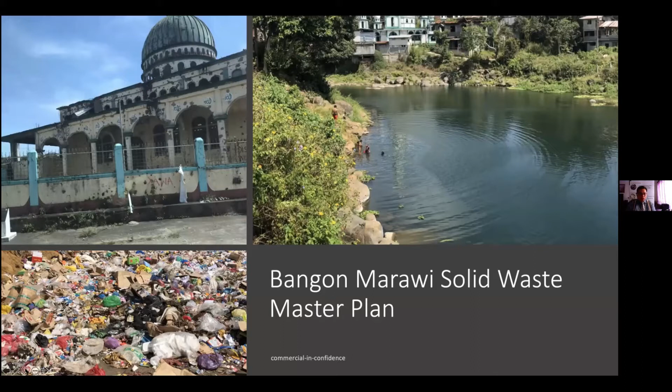Marawi City was the victim of the siege, and they are now in recovery called Bangon Marawi. So we finished the consultancy on the solid waste management plan under the auspices of EMB Region 10. EMB Region 10 is also our client in quality management system.

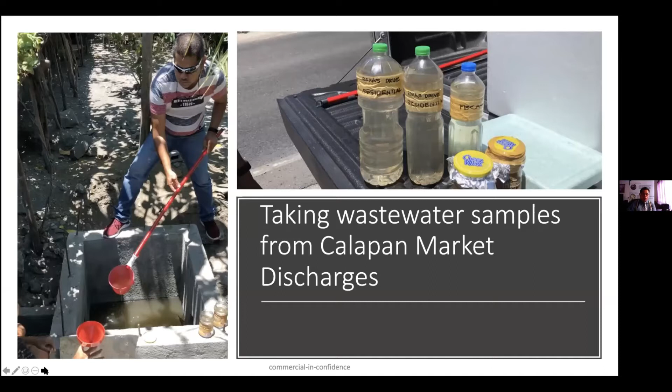We were the consultant of Calapan or EMB Region 4B under RD Michael, sa Calapan River for the protection of Calapan River sa Calapan City. So we conducted this feasibility study and we were able to finish that. This is the board meeting of the Calapan River Water Quality Management Board and EMB.

4B in Mimaropa. Okay, so we are the consultant for the protection of waters of Panglao Island in Bohol, with the leadership of local mayor Leonela Montero, and of course the local councilor on environment Noel Hormachuelos. So we were able to deliver, just during the pandemic, the National Sewerage and Septage Management Plan for the municipality of Panglao.

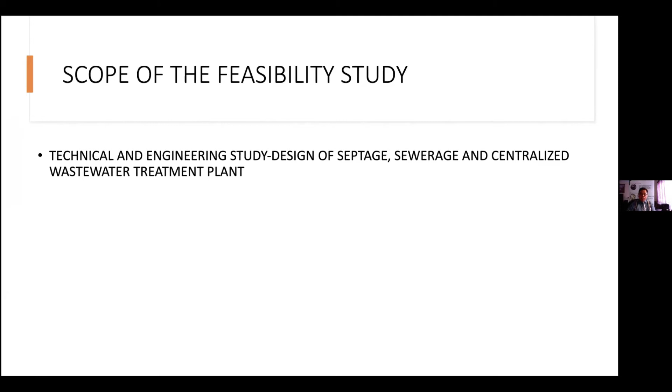So there you are, that is our work. What were the scope of our feasibility study? The scope of our feasibility study is we conduct technical and engineering design study for the septage, sewerage, and centralized wastewater treatment plant. We conduct financial analysis of the different technologies of the septage, sewerage, and wastewater infrastructure and sourcing of investors as well.

We conduct environmental impact assessment of the infrastructure, including protection of indigenous people and gender sensitivity. That's part of the feasibility study.

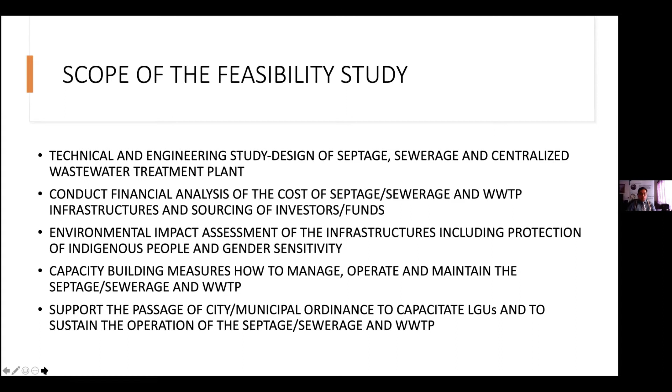We conduct capacity building measures on how to manage, operate, and maintain the septage, sewerage, and centralized wastewater treatment plant. And we support the passage of municipal or city ordinances to capacitate local governments and to sustain the operations of the septage and sewerage. So those are our deliverables. Kung meron dyan mga LGU, we can help you do that.

So these are some of the pictures of our treatment plants. This is our biggest wastewater treatment plant in the Philippines, 1.7 million liters per day of sugar mill wastewater treatment, the hardest wastewater in the world. Napakataas ng BOD, 90,000 BOD.

So we're able to deliver, and fortunately, I would say fortunately, it has already passed the DENR standard, and the commissioning was still ongoing during that time.

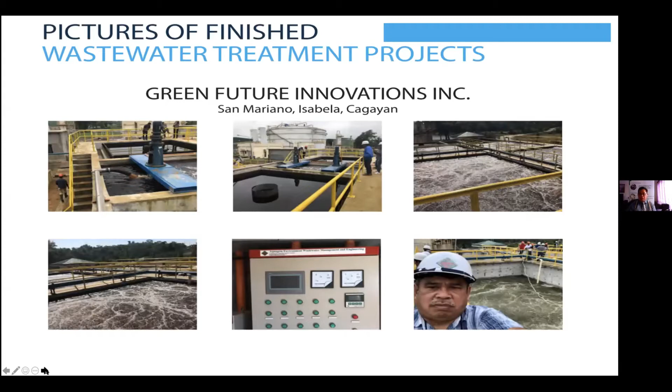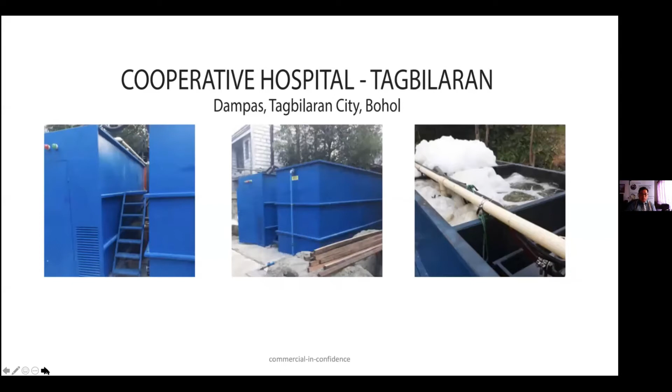We have some pictures of hospital wastewater, small wastewater treatment plants, like in Cooperative Hospital in Tagbilaran City. We have this picture. We have also the same in Cebu City, the Seaman Hospital in Cebu City. We have in Isabela United Doctors Medical Center this kind of wastewater treatment, and recently we delivered the slaughterhouse wastewater treatment plant in the municipality of Guindulman in Bohol.

So those are just to mention a few of our projects, elaborating on the services that we are offering. Now let's go to the topic of our National Sewerage and Septage Management Plan.

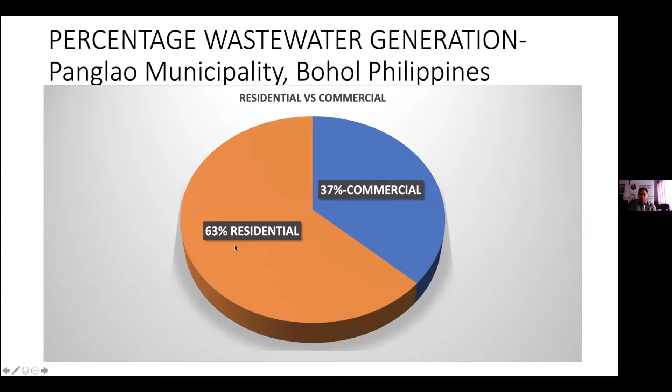So you will notice that DENR can only run after the 37% kasi yun lang that is only their mandate. But if they run after 37%, the 63% is not being protected, then the pollution is still happening. So this is information to you that this is not only about commercial pollution, but also pollution coming from residential areas. Okay, so what do we do?

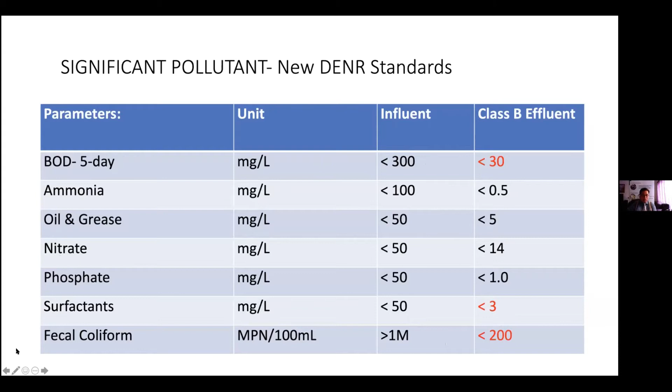So you have ammonia, oil and grease, karamihan sa restaurant, nitrate and phosphate because of nutrients, surfactants, mga sabon, fecal coliform because of bacteria and viruses. Okay, now what do you mean by septage management? I would like to elaborate that business establishments, lahat ng business, are required to have a septic tank.

You cannot build a house without a septic tank. Before a building permit is issued under the building code, you must have a septic tank. In old septic tanks, wastewater percolates to the ground through the third chamber. Now the requirement is all septic tanks must be sealed, completely sealed. Wala nang mag-percolate to the ground - nothing percolates to the ground anymore.

A septic tank is a primary wastewater treatment capable of removing pollutants by 50%. So it's important to have a septic tank because it removes 50% of pollution. Domestic wastewater has 300 parts per million of pollutant. So if it's reduced by 50%, it will go down to 150.

Then the requirement of the Sanitation Code of the Philippines or the Water District Law is that you must desludge your septic tank every 5 years. That's mandatory, and it should be enforced by local government.

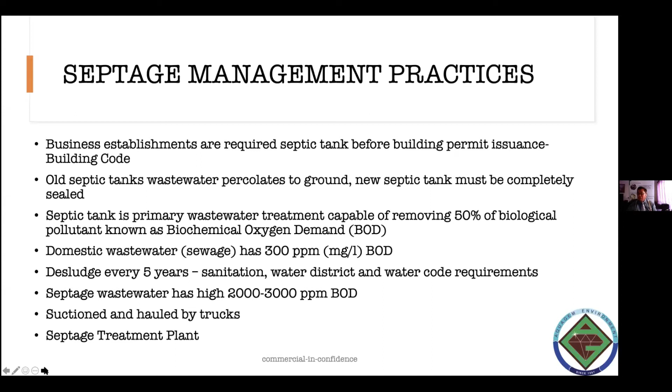So if there's no septage treatment plant or wastewater treatment plant, when there's suctioning, it just gets disposed of somewhere. Nilipat lang yung pollution - the pollution is just transferred elsewhere. Okay, that's about septage.

Now let's make an example so you understand. In Bohol, according to our study, a tourist can consume 180 liters per day. If a hotel has 100 persons or is a 100-bed hotel, multiply that 180 liters per day, every day that hotel discharges or consumes 18,000 liters per day of water.

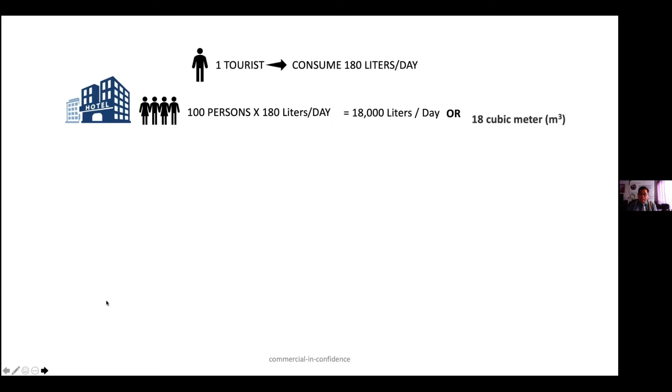The water will not be kept - it must be discharged or thrown away. That's 18,000 liters per day, for example, in that hotel, or 18 cubic meters per day, since one cubic meter is 1,000 liters.

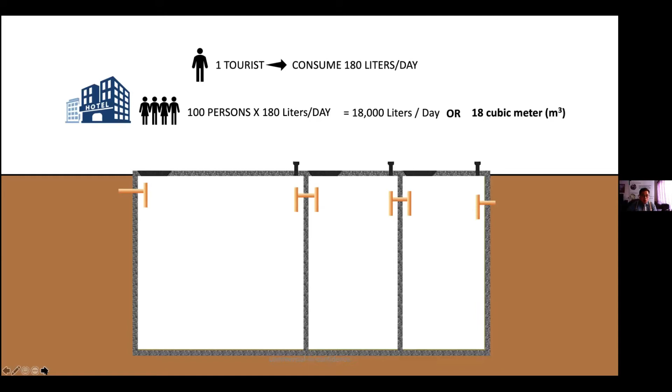So if this is a septic tank, with a first chamber, second chamber, and third chamber, the water comes in. For example, this septic tank has a dimension of length 3 meters, width 2 meters, and height 1.5 meters. Calculating 3 times 2 times 1.5, the volume is 9 cubic meters. But every day this hotel is producing 18 cubic meters.

So that means in half a day, the septic tank gets filled up. It's not true that just having a septic tank solves everything - the hotel cannot keep this water because water cannot be compressed, it's incompressible. So 9 cubic meters capacity versus 18 cubic meters per day means in half a day or 12 hours, the septic tank is already filled.

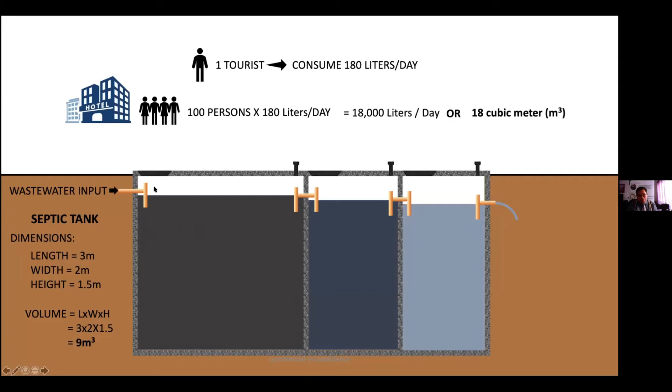Now what happens is when water comes in, it fills the first chamber, goes to the second chamber, then the third chamber, and of course it overflows. So what comes in, comes out. Once it's full, since it fills up every day, then it comes out.

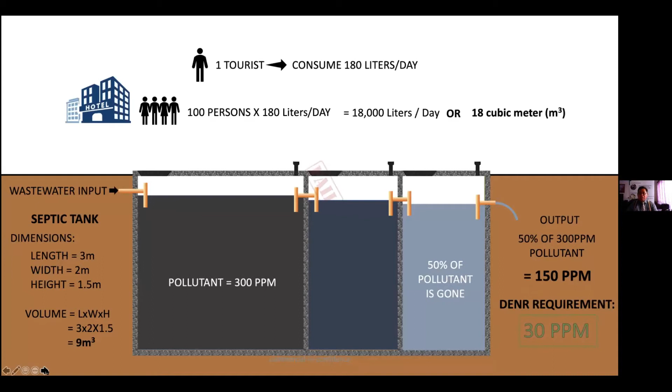Take note that the pollutant level coming in is 300 - remember I told you pollutant is 300. If it's 50% pollutant removal in the septic tank, then it will reduce that by 50%. If 50% of pollutant is removed, then what comes out is 150 ppm. So 150 ppm comes out from the septic tank, but the DENR standard is only 30. So don't tell me that just because you have a septic tank you pass already - you are still polluting. In short, it doesn't comply. The septic tank alone cannot comply with the DENR standard.

Okay, the Clean Water Act says it requires that wastewater discharge quality is equal to the beneficial use or water body classification. What does that mean? If you discharge water, you must discharge the same quality of water appropriate to the use of that receiving water. For example, in Panglao, it's a water body where people swim - if you swim there, it's classified as Class B, and Class B means you have to follow Class B standards.

So if it is 150 coming from a septic tank, you are polluting the waters of Panglao the same way as in other places. Now, what are we going to do? You must have a wastewater treatment plant in order to bring it down to 30 to 50 parts per million of pollutant. As simple as that.

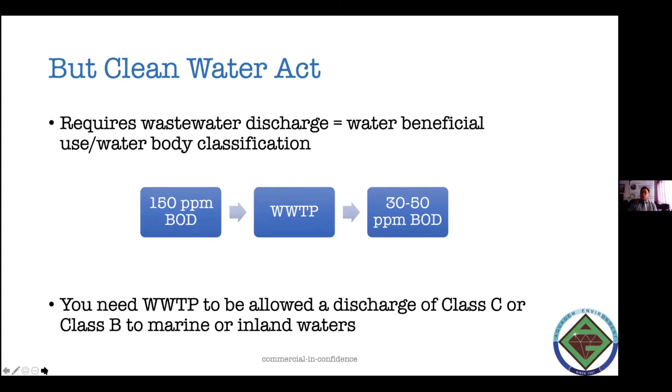You need a wastewater treatment plant to discharge to Class C or Class B marine or inland water. This is what the Clean Water Act says, and this is what Director Cunyado said to you earlier. So what is the solution?

This is what we call sewerage and septage management. What is this? Sewerage is a reticulation or conveyance network. It could be a combined storm and sewerage system or a standalone conventional sewerage system, meaning if you have a septic tank and there is a sewerage system, you have to connect to it. Now, in the Philippines, there are only very few sewerage systems.

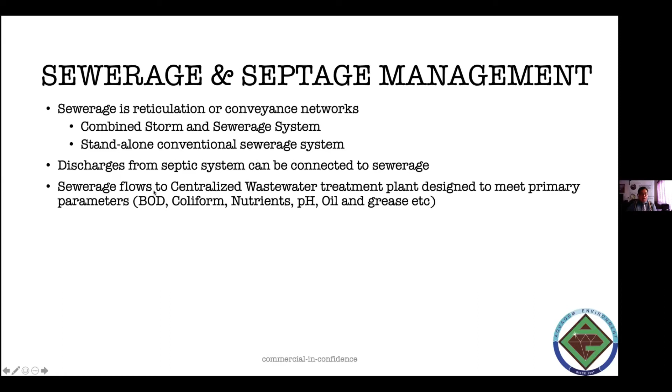Most of the sewerage systems are in residential areas, condominiums, or new property developments. Now, the discharges from a septic system can be connected to the sewerage. The sewerage will flow to a centralized wastewater treatment plant to meet the parameters required by the DENR. Industrial wastewater must be pre-treated to meet the centralized wastewater treatment criteria in order to connect to a sewerage network.

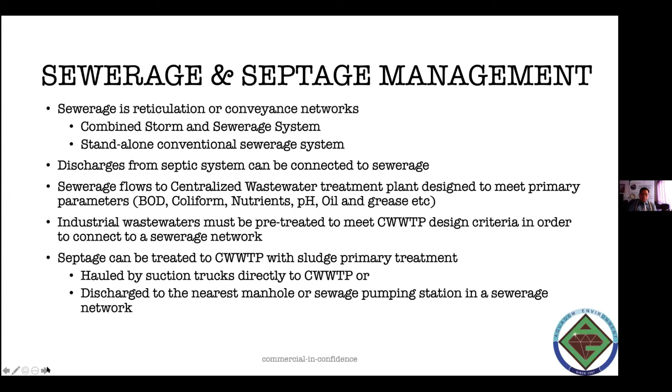Take note, septage can still be treated at a centralized wastewater treatment plant with sludge primary treatment. It will be hauled by suction trucks directly to the centralized facility, or it should be discharged to the nearest manhole or sewage pumping station in a sewerage network. This is what we call a proper sewerage and septage management system. It's a combination of sewerage and septage.

Now, these are the facts: on-site wastewater source versus centralized wastewater. On-site meaning each one has their own wastewater system, versus centralized wastewater. Sewerage and septage with centralized wastewater is more effective in protecting waterways than on-site wastewater treatment plants. It is cheaper to connect to a sewerage than to build your own wastewater treatment plant.

However, sewerage networks and centralized wastewater treatment plants are not a clear requirement in the Clean Water Act of the Philippines. Unfortunately, there is no mandate that says you must have a centralized wastewater treatment plant. All the Clean Water Act says is you must connect to a sewerage network. The cart comes before the horse - there is no sewerage network to connect to. So that is the problem.

The problem now is everyone must follow and must have their own on-site wastewater treatment plant. Now, the problem with that is when you have your own wastewater treatment plant, it's also expensive to run. So that is the problem - even if you buy a wastewater treatment plant, which is expensive, you have to run it too. It's like buying a car - you have to put gasoline so that it will run.

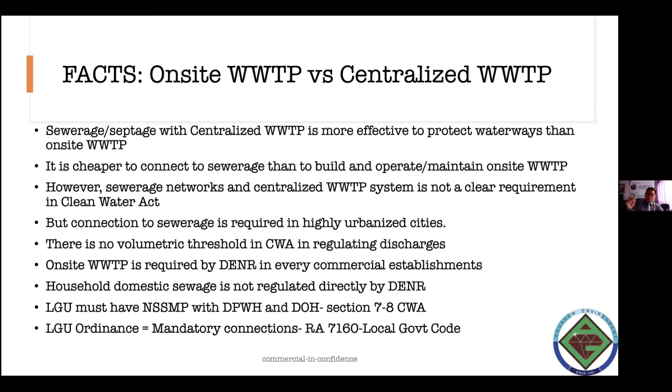It's not only EMB that has power. The local government, under RA 7160, otherwise known as the Local Government Code, is mandated to protect the environment. So they can issue ordinances to mandate connection to a sewerage network to ensure compliance with Section 7 to 8 of the Clean Water Act. This is key for the LGU.

Panglao municipality is leading the way because they already have the National Sewerage and Septage Management Plan, and later came up with an ordinance. Boracay already has an ordinance but it wasn't followed. I told Panglao, you must make sure this is properly complied with in order to protect the pristine water of Panglao Island. That's my explanation to everyone, because this is how we should manage and protect our waterways in the Philippines.

Aquagem Environment is sharing our experience here in Australia. In Australia, there's no such thing as an individual wastewater treatment plant — all are centralized sewerage networks. The problem with centralized sewerage networks is that they're very expensive to put up. But under the Clean Water Act, 50% will be shouldered by the national government to put up a sewerage network, as long as there is a national sewerage and septage management plan.

Panglao already has this plan. Other regions, like Lake Buhi as I mentioned, already have it too. Calapan is one of them, and some other places already have this as well. So they should be able to put up this infrastructure in order for every volume of wastewater to be treated.

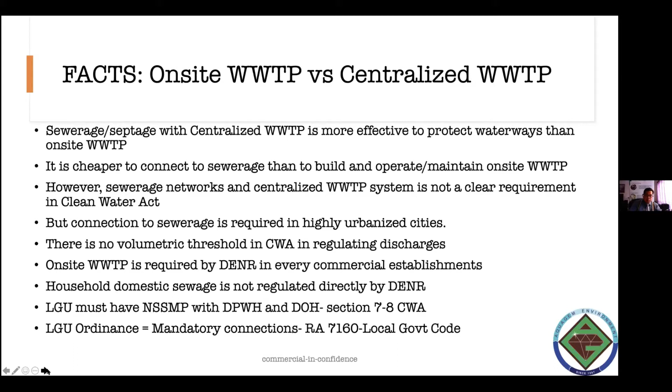So who will finance this? In Panglao Island, they have already awarded the project to an investor who will put up this facility, and very soon it will be operational. So that's the success story, and I hope it continues since they have already awarded it to the investor.

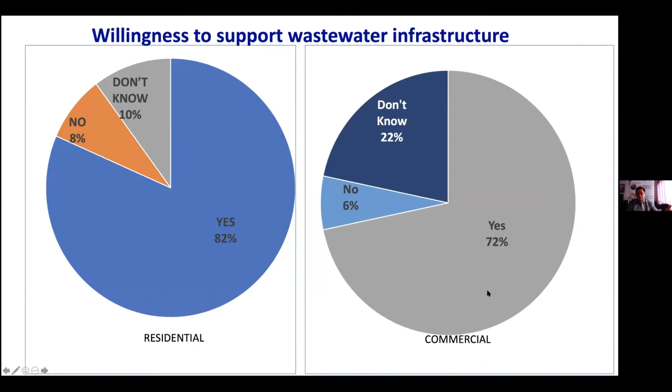This is the survey we conducted on willingness to pay, part of our feasibility study. We asked residents and commercial establishments if they are willing to support wastewater treatment infrastructure. In the residential area, 82% said yes. In the commercial area, 72% said yes. But when asked if they're willing to pay for wastewater treatment infrastructure, most residential respondents said yes, while commercial establishments said they don't know — maybe they don't want to pay, or maybe they already have their own wastewater treatment plant. But with the passage of the municipal ordinance, they have to comply.

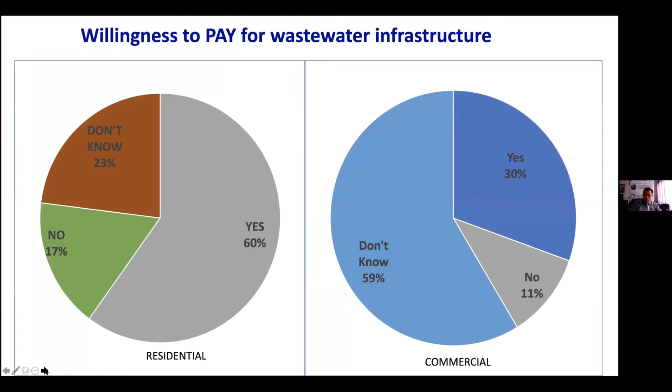This is an example of why it's cheaper to connect than to buy your own STP. The case study I gave is a 50-room hotel, with a wastewater treatment plant for 100 persons, 2 persons per room, producing 18 cubic meters daily. The daily fee for that hotel is 1,254 pesos to connect to a sewer. The monthly fee, times 30 days, is 37,000 pesos. The yearly fee is almost 500,000 — 457,000 pesos — to connect to a sewer. This is the payment to the investor of the centralized wastewater treatment.

Now, if that hotel is going to buy their own STP instead, for 18 cubic meters per day, rounding up to 20, the STP that actually works would cost about 3 million pesos. There are many STPs that work, but I'm telling you, an STP could cost 3 million. Plus there's OPEX, operating cost of 1.7 million per year.

So the break-even point comparing this cost to connecting is 10.36 years — that's your ROI if you buy your own STP instead of connecting. That's too long. So if I were the hotel owner, I'd connect to a centralized wastewater treatment facility — that would be easier, plus I wouldn't have the problem of running the system myself. That should be the proper way to manage it.

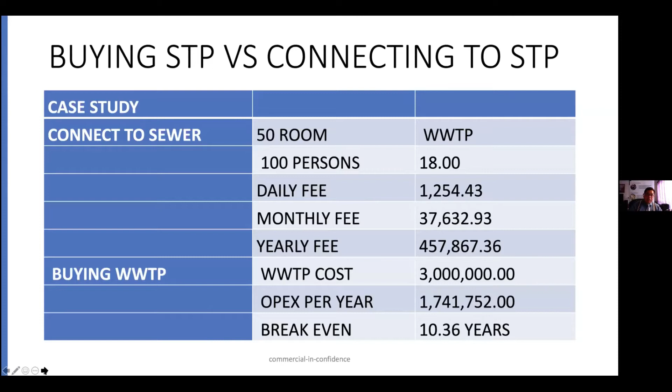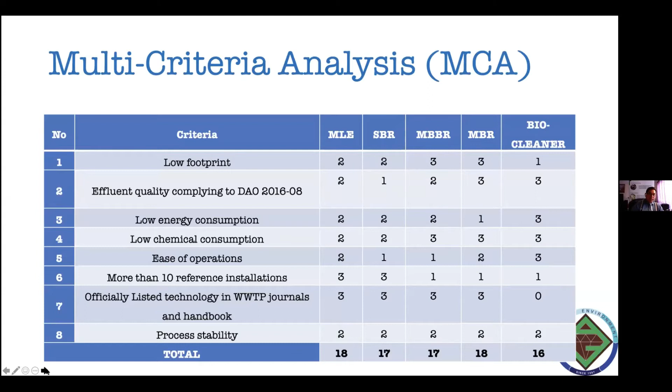So with that, I'm going to turn it over to my colleague for the comparison of different wastewater treatment technologies. I would like to introduce to you our colleague.

She is a chemical engineer by profession. She used to work at Coca-Cola in Isabela. She joined Aquagem three years ago. She was one of the main engineers who delivered our projects for Bangon Marawi during the pandemic, and currently she is doing environmental impact assessment work for our water projects in Bohol. She's young but very energetic, successful in her field, and very interesting. She is taking up a Master's in Environmental Engineering at the University of the Philippines. Let's welcome Engineer Sheila Rimo to provide the presentation on the comparison of different wastewater treatment technology. Take it away, Sheila.

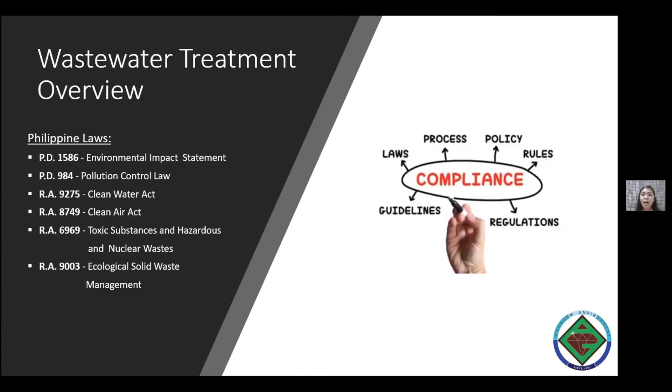Basically, wastewater is defined as used water or liquid generated by humans due to various daily activities. If domestic, it comes from our toilets and sinks; if industrial, it comes from discharge or drainage. If this wastewater is discharged untreated...

it will cause environmental effects like water pollution. Water pollution is a result when contaminants are introduced into the natural environment, which causes disruption of aquatic systems. Wastewater also consists of pathogens, or disease-causing bacteria, which may be carried into drinking water, causing harm to humans and animals. Other disadvantages include water scarcity, loss of biodiversity, and climate change.

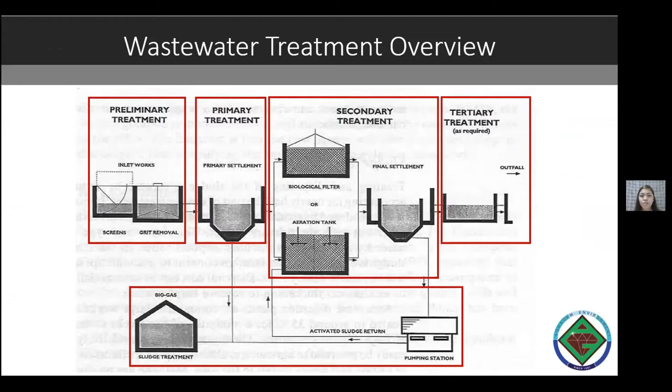So you may ask, how does a wastewater treatment work? A typical wastewater treatment plant is divided into four levels of treatment: the preliminary treatment, the primary treatment, the secondary treatment, and tertiary treatment, which involves a combination of physical, chemical, and biological processes and operations.

I will discuss how it works for each treatment unit process. Initially, our raw wastewater discharge coming from the toilet or sinks contains large solids and grit that can interfere with the treatment process or cause damage to mechanical equipment. To minimize these potential problems, the wastewater needs to undergo preliminary treatment, which consists of screening, grit removal, and flow equalization.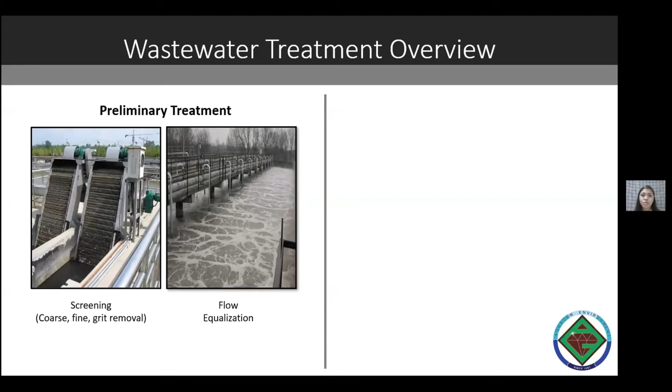Screening is the first unit operation in a wastewater treatment plant, and its objective is to remove discards and large solids such as paper, rags, plastics, and metals found in raw wastewater. After which, it will flow into the flow equalization tank. This tank, usually aerated, acts as a buffer to homogenize fluctuating quality and flow conditions of wastewater before going to succeeding treatment processes.

Then after which, the wastewater is pumped into the primary settling tank, or the primary treatment, where the flow velocity is low. This then allows the settleable solids to settle by gravity and separate from the liquid.

The settled solids are called the sludge, and the clarified liquid is called the supernatant. The settled solids, known as sludge, are wasted and normally removed from the bottom using sludge rakes that scrape the sludge to a drainage well, from which it is pumped to the sludge processing units. On the other hand, the floating solids in the settling tanks are called the scum, and it's collected by mechanical means and also pumped to sludge processing units.

In general, this primary treatment removes about 50% of the suspended solids, 25 to 50% BOD5, about 10 to 20% of organic nitrogen, and about 10% of phosphorus in this process. Its removal capacity can also be increased by adding coagulation, flocculation upstream, or by using filtration downstream or sedimentation tanks.

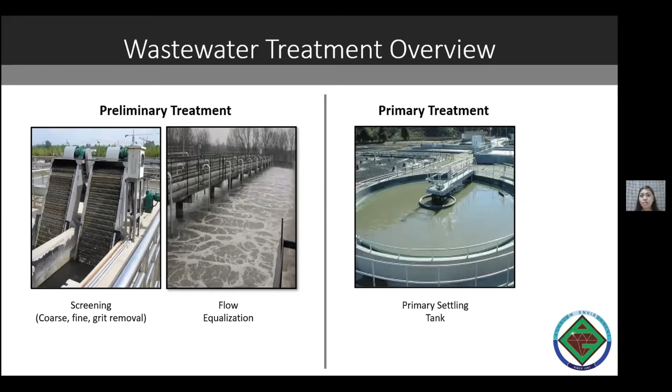Meanwhile, the clarified liquid, or supernatant, from the primary treatment will go to the secondary treatment, which involves biological aeration. I call this the heart of the wastewater treatment process because it has living microorganisms, or what we call the good bacteria, which degrade or eat the organic contaminants found in our wastewater. This aeration tank is supplied with oxygen using diffusers or air blowers.

Following the aeration process, the microorganisms are separated from the liquid by sedimentation in the secondary clarifier. These microorganisms, known as activated sludge, will settle in the clarifier and can be returned as returned activated sludge, or RAS. Or it can be wasted as waste activated sludge, or WAS, depending on the state of the wastewater or microorganisms in the aeration tank.

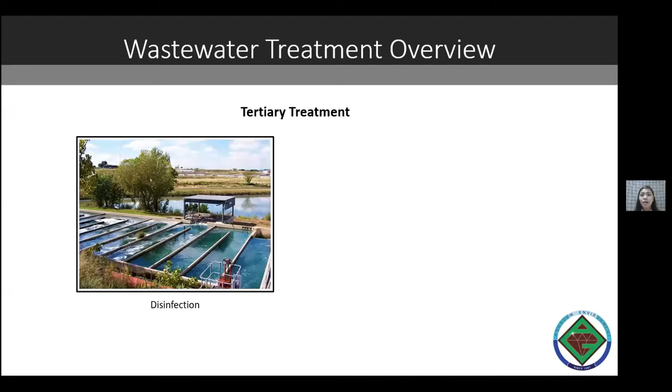After this disinfection, the effluent, now considered clean water, is ready to be discharged to receiving water bodies. Meanwhile, the waste activated sludge will be pumped to sludge dewatering equipment for sludge conditioning, which may be used further as fertilizers and soil compost.

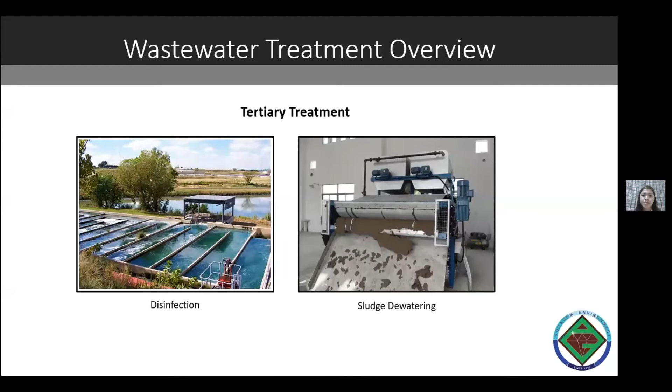Now we will go further in discussing the four various wastewater technologies and their comparison with each other, mainly in terms of the configuration of the biological aeration tank. Let me start with the conventional activated sludge, or CAS.

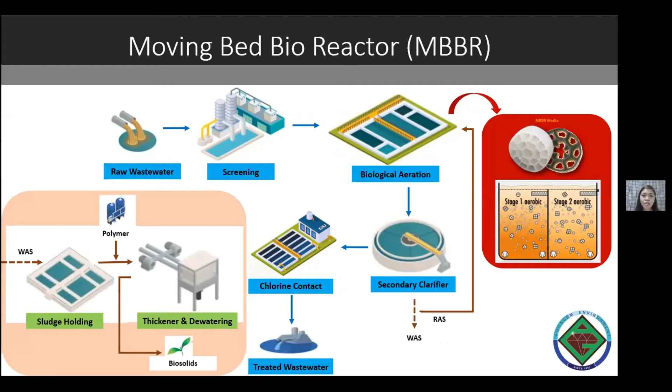Same as before, the settled activated sludge from the secondary settling tank can also be returned to the aeration tank to increase or maintain the microbial population, while the waste is collected for sludge treatment and disposal.

Next technology I will be discussing is the sequential batch reactor or the SBR. We know that the SBR is the most usually installed technology here in the Philippines.

In this system, the wastewater is added to a single batch reactor. As the name implies, it is a batch reactor, not continuous, and it has an operation based on the fill and draw principle.

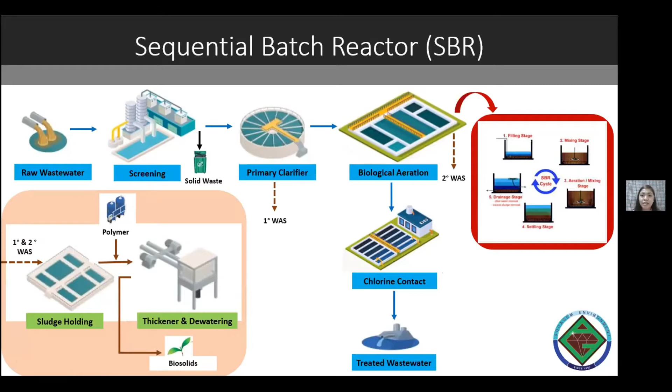So the waste sludge from the first and second settling tanks are again collected and treated, same with the process discussed from the CAS process.

So the next technology is the membrane bioreactor. This membrane bioreactor is a treatment process where the wastewater is passed through a semi-permeable membrane, a material that allows various particles to either flow through or be trapped by the membrane.

So you'll notice that in this process, the primary and secondary clarifiers are eliminated because of the inclusion of the membrane bioreactor. So the system utilizes these membranes with coarse bubble aeration for mixing.

So the process differs from the conventional treatment in that separation of solids is not done by settling tanks, but instead by membrane filtration, which can be either microfiltration or ultrafiltration. Microfiltration membranes range from 0.1 to 10 micrometers, while ultrafiltration ranges from 0.1 to 0.01 micrometers.

So from the membrane, there's also a return sludge for the replenishment of microorganisms into the aeration tank. So the system generates two streams, which is the permeate or the liquid which has passed through the membrane, and the other is the concentrate.

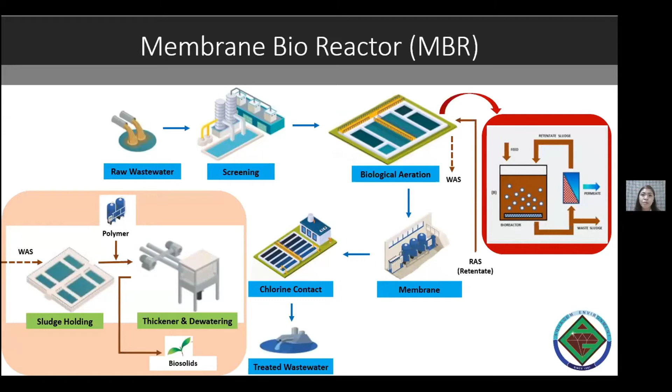Okay, moving on, I would like to share with you the feasibility study that Aquagen has conducted. So last August 2020, Aquagen conducted a feasibility study for the construction of its centralized wastewater treatment plant for domestic and commercial discharges in Panglao, Bohol.

The treatment plant has a projected total maximum capacity of 5 million liters per day, and Aquagen did a design for its phase 1 with a volume of 1 million liters per day. As part of this study, these wastewater treatment technologies that I discussed a while ago were considered in terms of its operational, financial, environmental, and social aspects.

Aside from these technologies, biocleaner technology was also considered since Aquagen is always on the lookout for new, innovative, emerging technology currently available in the market. Sir Cecil Corlancito will explain in detail later about the biocleaner technology.

For now, I will be sharing with you the multi-criteria analysis that we have used and the results. Aquagen used this multi-criteria analysis to evaluate each technology according to performance capability, which are shown on your screen, which is essential in selecting and before investing in a wastewater treatment technology that can satisfy the requirement or standard of the Panglao wastewater treatment plant design.

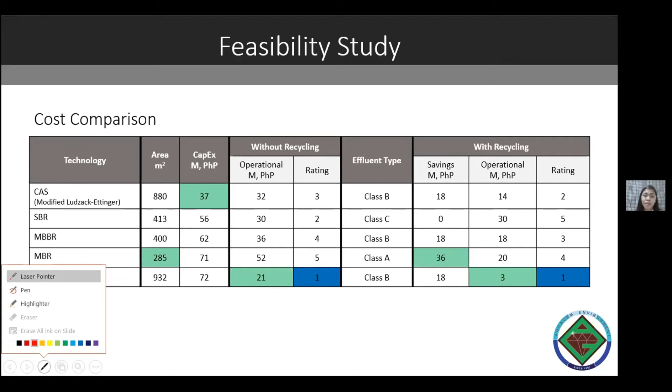So in summary, the CAS is the typical wastewater treatment we are using, and SBR is the most installed wastewater treatment here in the Philippines. But sometimes because of its small footprint, it is prone to being choked, since the footprint is small, so it sometimes gets overwhelmed.

The MBR can give you high effluent standards, but it is too expensive. The MBBR uses carriers or media to increase design capacity. And biocleaner technology is not yet listed in any technical references but guarantees the lowest operational expenses.

You will notice there is an air blower of 1.75 kilowatts. Take note of that. For the other technologies mentioned by Sheila, the air blower requirement for all 4 technologies requires at least 15 to 20 kilowatts of air blower. But this one only uses 1.7 kilowatts, so that's 90% less electricity for the air blower.

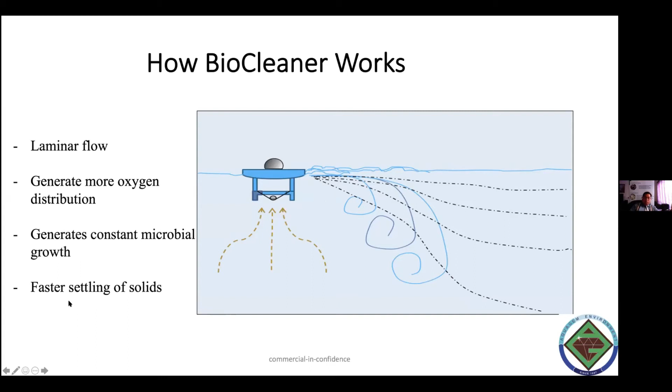So further, when wastewater comes in, as I mentioned, wastewater comes with different kinds of bacteria. The good bacteria from the biocleaner technology, from the biotube, represented by this green color, outnumber or outcompete the other bacteria coming in. If they are outcompeting the other bacteria, of course the other bacteria cannot eat because this bacteria is the one eating the food. The other bacteria will die. Once this bacteria dies, then the good bacteria will eat them. The good microbes digest the bad microbes.

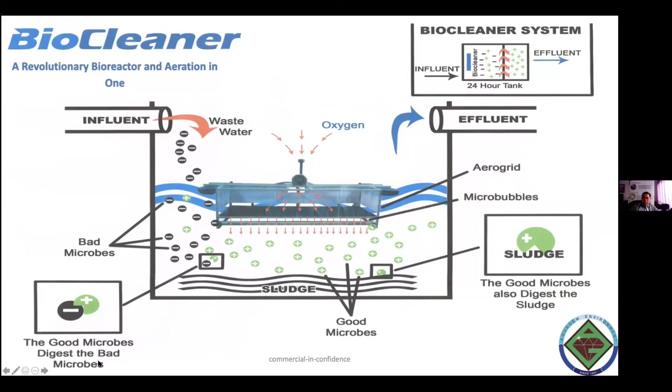And when they die, they form sludge, and the good bacteria further digest the sludge, eating all of it. So in short, all solid waste coming in, including bacteria themselves, kung namamatay na sila (once they die), because bacteria are living organisms, they will die. Once they die, these bacteria exponentially propagate and eat all of them, resulting in no more solids coming out in the effluent. This is the explanation why this technology is an emerging technology—it does not use much electricity and it does not produce solids. In essence, this is a technology which is smaller, can be replaced, can be relocated, and is environmentally independent from the tank.

You can put this anywhere. Low maintenance costs. If there's a problem, you can just pull it up and repair it. Unlike those other 4 technologies, you have to make sure to drain all the wastewater from the tank and repair the diffusers underneath. Note as well, this is a remediation process.

There is no odor because the remediation breaks down the odor into carbon dioxide. So no sludge handling, no chemical usage. In essence, this is very advantageous.

We, for the first time, Aquagem has been awarded to install this technology in Manila, and it is ongoing under Engineer Obit Akot, who's with us here. And I will tell you, this is a very good technology if properly managed.

BioCleaner technology is just selling this technology, this one. But Aquagem incorporates this kind of technology into the overall design of the process. BioCleaner is just only this one. The BioCleaner company sells this one, but Aquagem makes sure to design the primary, the secondary, and the tertiary treatment process. So they are claiming that they can do only BioCleaner, but Aquagem does not believe in that.

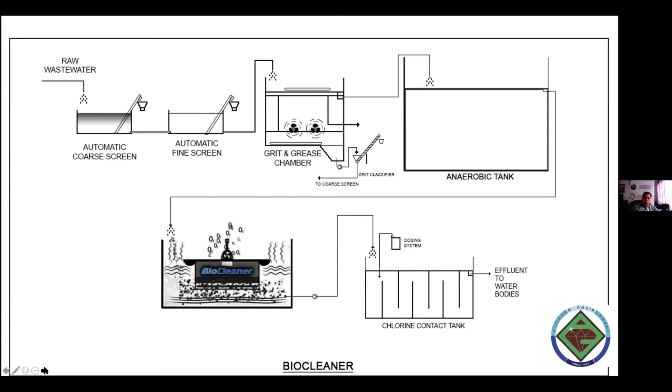Okay, so in summary, in my technical explanation as an engineer, why is this a low capital expense? There's no clarifier, no sludge dewatering equipment. There are no big blowers, there are no diffusers. So naturally, the capital expense is low.

Why is there low operational expense? There are no huge air blowers, no pumps and equipment anymore. So the electricity cost would be very, very low.

Why is there no blowers and air diffusers? Because it only utilizes a small mixer for bacterial movement, laminar flow, to take oxygen from the atmosphere so that the bacteria can take oxygen from the atmosphere.

Why is there no sludge? The bacteria is called saprobic bacteria. This will devour all dead solid matters, including dead bacteria. That is why no sludge is generated.

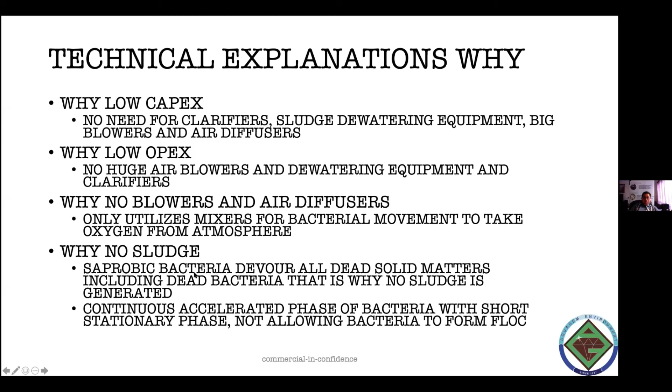Continuous accelerated phase. If you are a microbiologist, bacteria exponentially accelerate, but when there's no more food, they start to die. But in this process, they do not allow a stationary phase to come up. They are always on the go. The bacteria is the patented technology of BioCleaner, and this is being incorporated in the Aquagem design.

Now further, this new standard by the DENR requires a very small amount of ammonia. We also have a technology for this, because ammonia is generated in waste as ammonium, then it breaks into nitrite and nitrate. Then the bacteria breaks them down to form nitrogen gas and energy, and hydroxide if there is food.

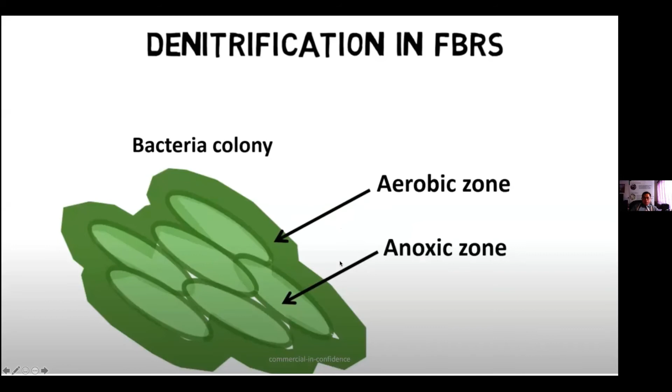That is called the nitrification and denitrification process, important in a sewage treatment plant. This treatment has both aerobic and anoxic zones. The bacteria forms the aerobic and anoxic zones. That's why they are able to have one layer of denitrifying bacteria, one layer of nitrifying bacteria, another layer for removal of phosphorus, and one layer of bacteria removing the BOD that we mentioned earlier. So this technology really is the future technology.

Now, because the ammonia requirement is very, very low, 0.5 ppm by the DENR, BioCleaner has also come up with an ammonia booster. This is only for those very difficult wastewaters that cannot meet 0.5.

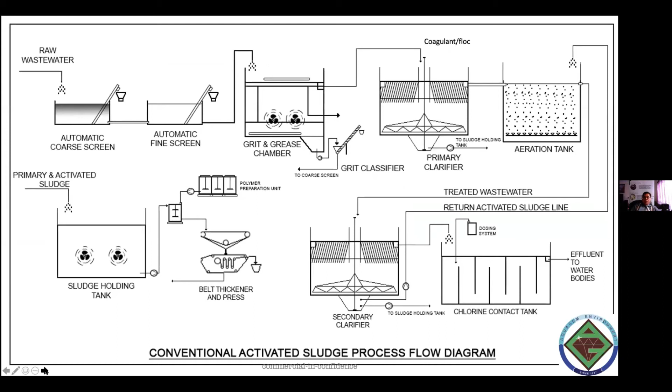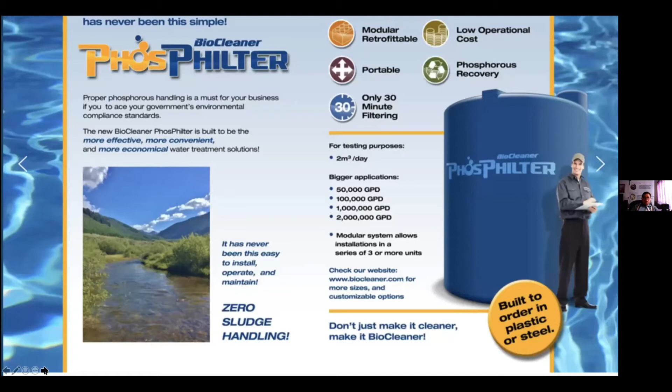Phosphorus removal also requires certain methods, we can use sludge or different coagulants in the treatment plant. But for BioCleaner, they have invented an ion exchange process to trap the phosphorus. So this is just the explanation of the chemical processes. We can also solve phosphate removal either by coagulation or by ion exchange process. Aquagem can do that.

Before I end my presentation, I will show you the case study in Honduras about this technology. This is the lagoon at that place in Honduras. This is the facultative lagoon. They put BioCleaner in it.

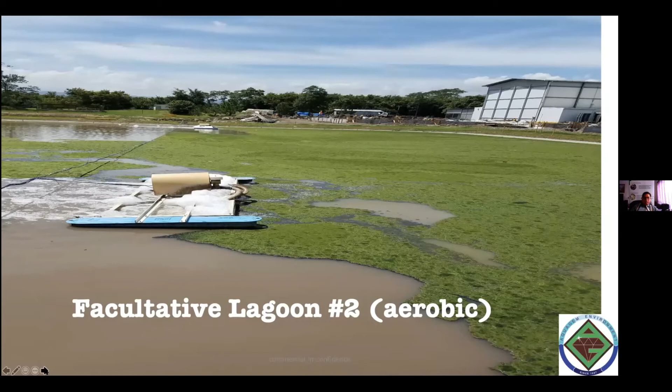Because you see there was so much algal bloom, nutrients already happening. So there was phosphorus and nitrates, so much nitrates. So when they put 12 units of the BioCleaner, they were able to stabilize the lagoon. And you look what happened after that. They cleaned the lagoon after putting in the BioCleaner treatment.

And this is the result from the laboratory. The effluent standard was not met earlier, but when they put in the BioCleaner, they were able to meet that standard in the lagoon.

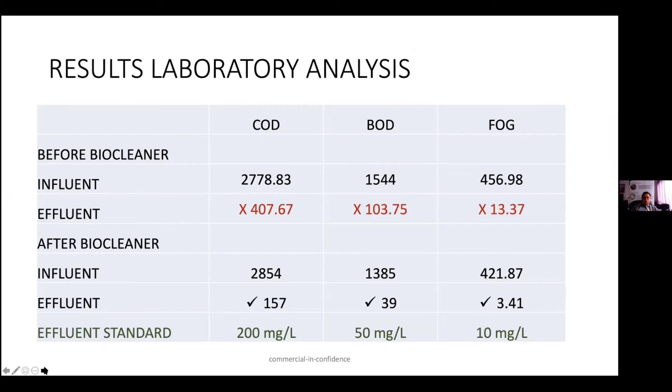There was a 95% reduction of COD, 97% reduction of BOD, 99% reduction of oil and grease, and 99% reduction of coliform. This technology has received an environmental technology verification, not in America, but in the Philippines, by DOST, the Industrial Technology Development Institute, because of their test in one of the estero in Manila.

The Philippine Geosynthetic Company, a Philippine company, used this technology and came up with this test in one of the estero in Manila. So with that, I have finished my presentation.

To summarize, if you are going to decide which technology, this is one of our proposals. SBR electromechanical was 22 million. Biocleaner was 20 million. Civil works needed a tank - the SBR tank was bigger, biocleaner's was smaller. So if you total the capital cost, there's a difference of 6 million in that particular food industry project we offered.

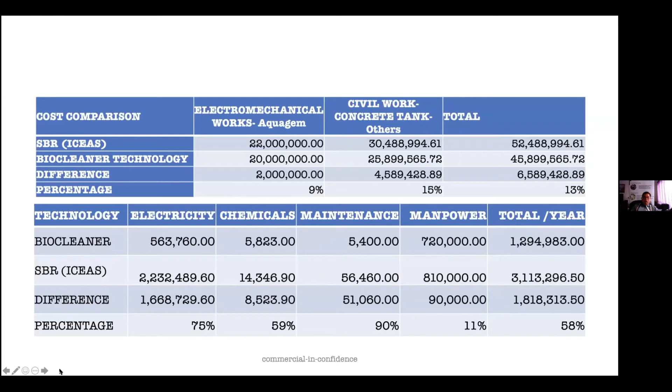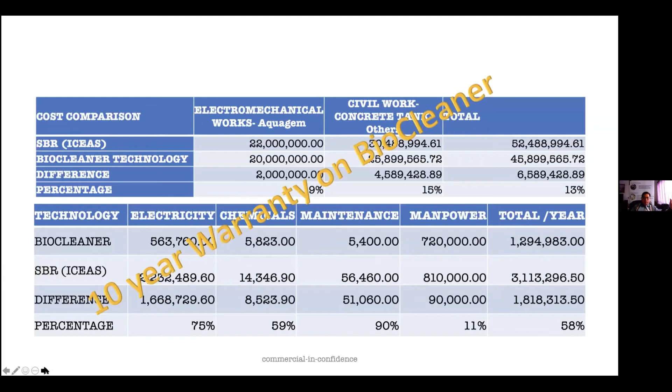For the operating cost, it's very clear that electricity is 75% less for biocleaner technology. All others - chemicals, maintenance, manpower - are also low. To summarize, biocleaner has 58% less operational expense. And biocleaner offers a 10-year warranty on their bacteria not to die, as long as they are being properly operated.

So we are challenging you, participants. We can offer a pilot project as part of the contract, and you don't pay if it does not work. This is what biocleaner offers. When it works, either you pay the cost of the pilot work or sign a new contract for a larger capacity. With that, it ends our presentation.